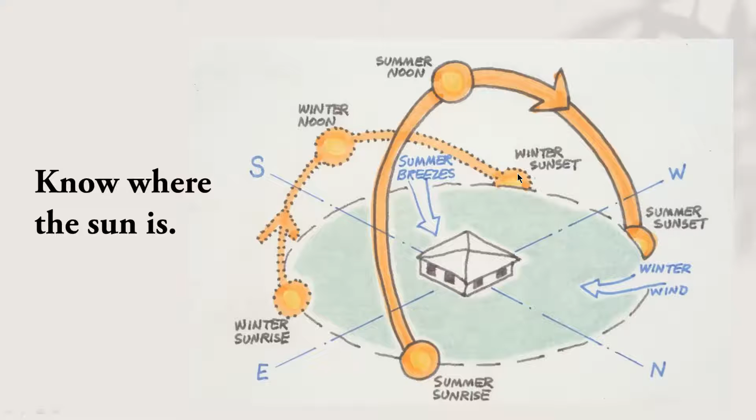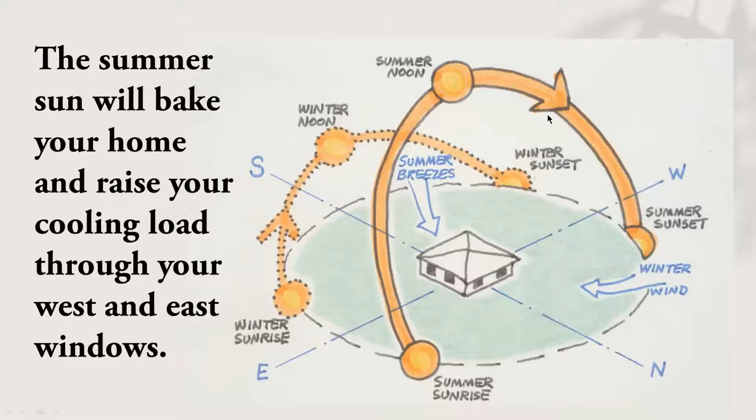So the summer sun over in this part of the day will just bake the west side of your house. And in the morning, if you've got windows over here, that will also increase your energy load to try and keep your house cool. So what you want to do is to plant trees over here on the west side of your house, and then of course the east side is important. The west side is more important because this is the heat of the day and you're really baking yourself now.

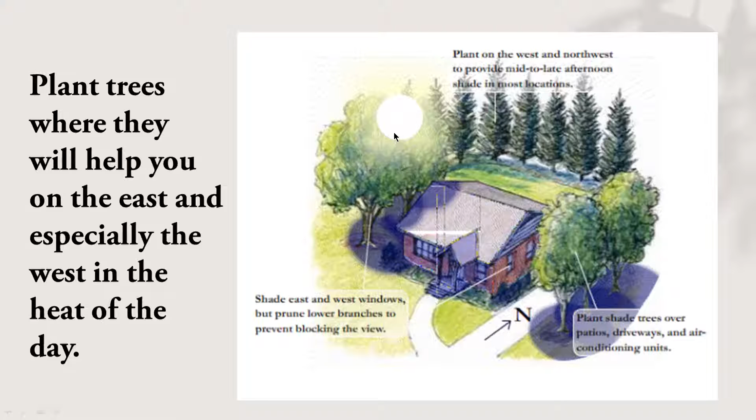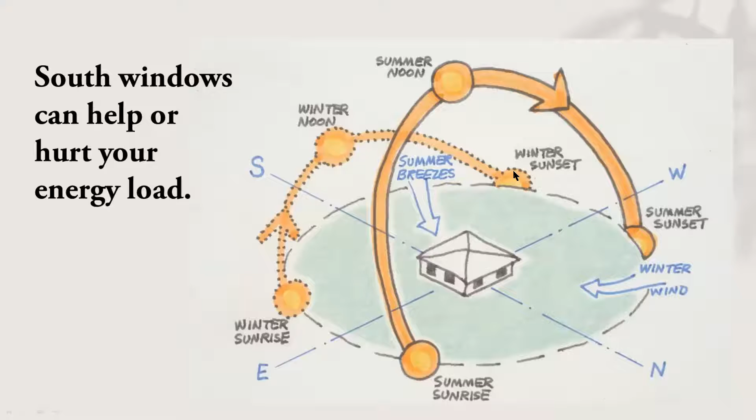In terms of the south windows in the wintertime, they can help you or they can hurt you. And the primary tool you've got is your overhang system. So you can see that we have a shorter window of time that the sun is rising in the wintertime. And here's what an overhang system looks like. We've got a 2-foot overhang this way. We've got 6 feet from the overhang to the bottom of the window.

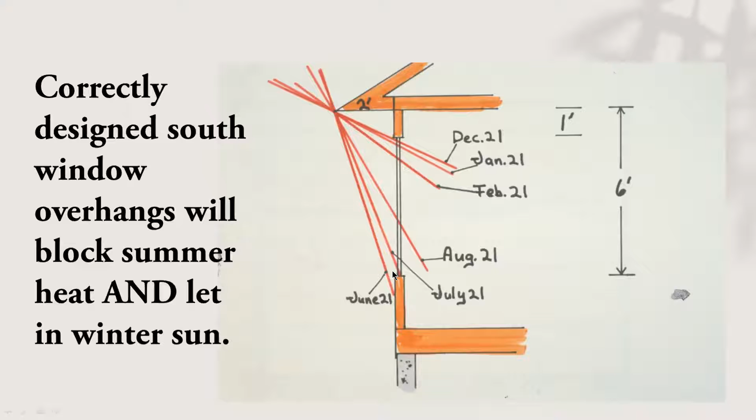And then we've got a 1-foot space between the window and the overhang. So you can see here that on these winter months, for the most part, the sun is going below and entering the house through the window. But in the summertime, for the most part, the overhang is also blocking the sun's energy. So the overhang works very well if it's designed properly.

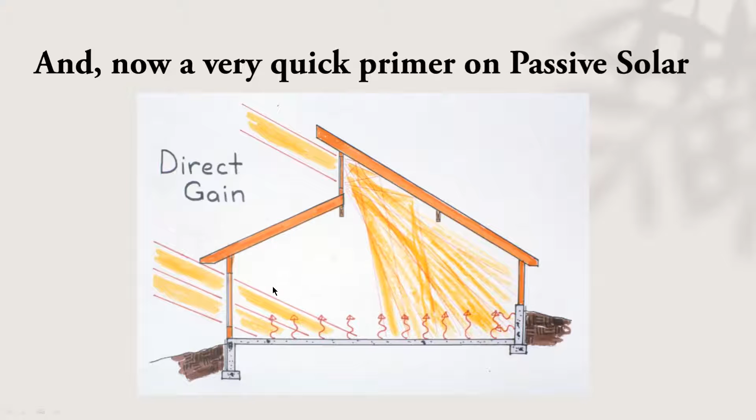And then the third element is the masonry floor in this case. And so this is what is called thermal mass. It absorbs the sun's energy and then releases that energy when the air temperature inside the house cools down. This overall configuration is called direct gain, meaning that all of the sun's energy goes into the conditioned spaces of the house.

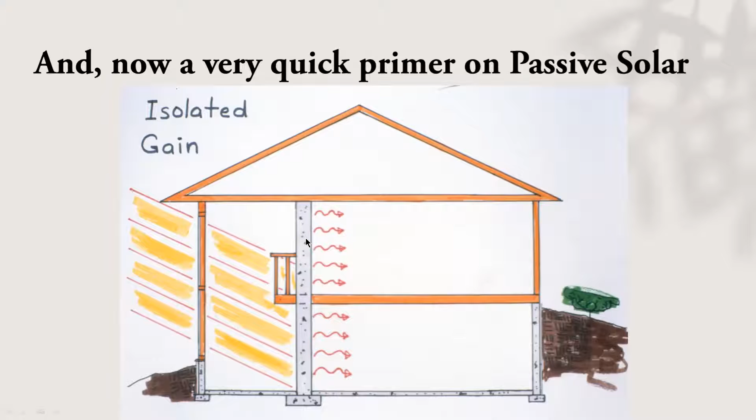Isolated gain is another type of passive solar system, and that is where the sun enters typically a greenhouse and hits a mass wall, and that mass wall will absorb the sun's energy. That energy will conduct through the wall and then into the living space. And the third type is indirect gain, where the mass wall itself is put right up next to the glass with a small airspace in between.

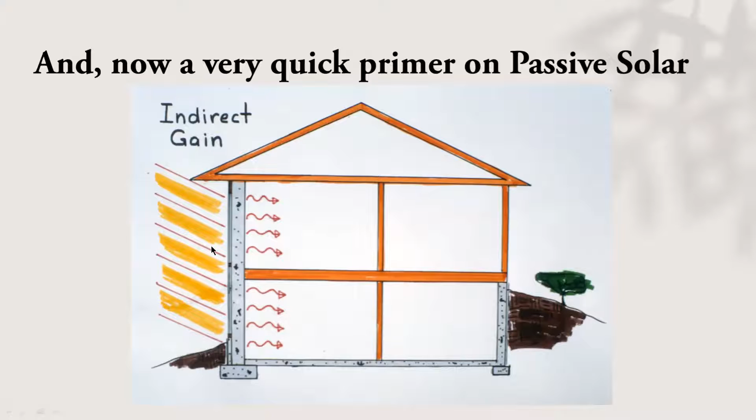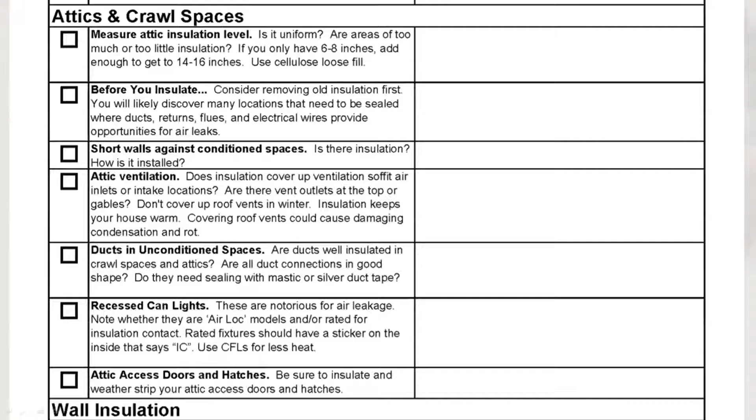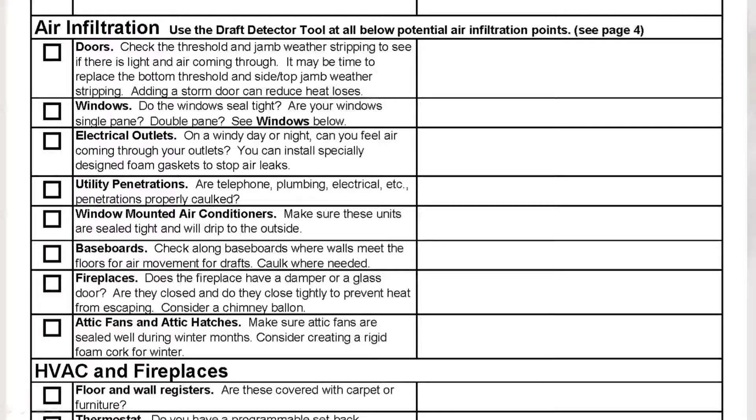Another important area is air infiltration: doors, windows, electrical outlets, utility penetrations, window-mounted air conditioners, baseboards, fireplaces, attic fans, and hatches. And I'm going to quickly go to an example of some of this. This is what we used to use. We would put this hatch on a piano hinge, and then we would raise it up and use these butterfly bolts to hold it in place.

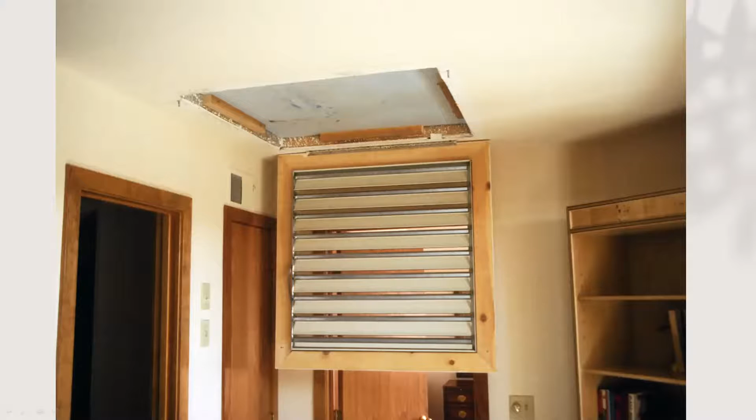And then in a down position, this shows the cork that we use, which is 2 inches styrofoam. It has a gasket on the back to make it airtight, and then it was held in place with 4 little pieces of wood around the perimeter. So there's several solutions for that. That is one great solution for attic fans.

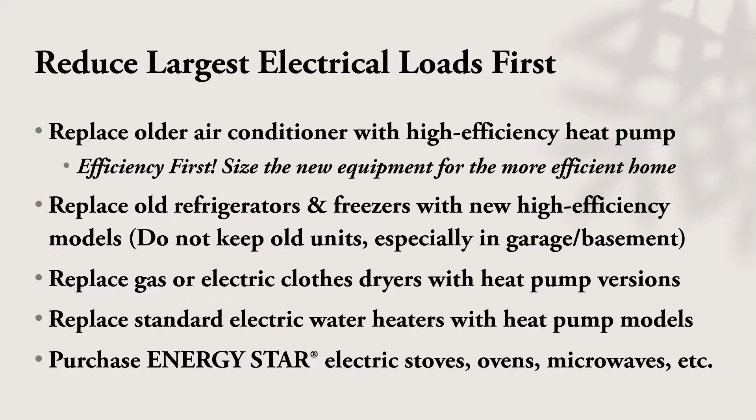Replace old refrigerators and freezers with new high efficiency models. You can even get super efficient models that use a fraction of the energy. We'll touch on that in a minute. Try to replace your gas or electric clothes dryers with a heat pump version if you can. Replace your standard water heater or your electric water heater with a heat pump model. And always try to find, if you're going to replace things like microwaves, stoves, ovens, dryers, or whatever, try to find Energy Star versions.

Other things that use energy, of course, are your computers, your copiers, your office equipment, your entertainment, TVs, and all. So try to find the Energy Star label, and when you do, there's ways to go to the Energy Star website and see if you can find the very lowest energy consuming or lowest wattage unit available.

And every remote controlled appliance in your home actually never turns off. People can turn them off, and your picture will go out on your TV set, but there's actually standby energy being used all the time, so that when you click on the remote to turn it on, it sees that signal and turns on. The only way it could do that is to actually be awake, technically 24/7.

So if you have some items that have remotes that you flip off at night, you can put them on a power strip and turn off the power strip, and it'll turn them off completely. And then you just kick the power strip back on when you're ready to start watching TV or listen to your stereo or whatever. And that isolates them. I mean, it brings them back to life as far as remotes go. So again, the Energy Star website will have that info. Make sure I'm moving along here.

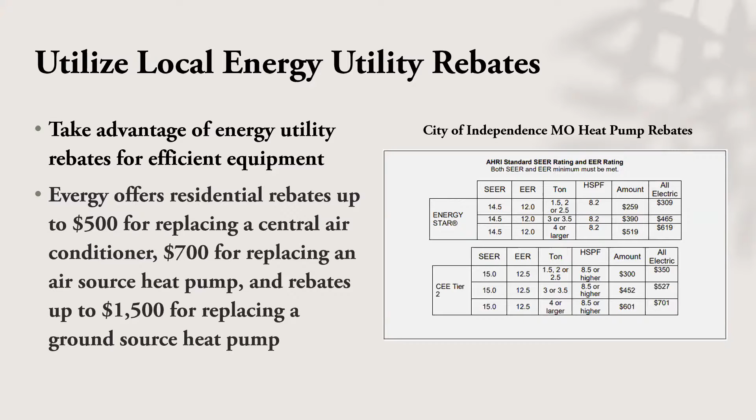And then City of Independence, Missouri, just as another quick example, has a similar rebate program where you can get up to $519 for a 14.5 SEER heat pump, and you can get up to $601 for a 15 SEER version. So there's rebates available, so don't forget about those. Check with your utility.

A quick overview of how electricity is done for most of us right now. If you don't have a solar system or wind energy system or another source of electrical power and you're relying on the grid, right now most of it still comes from coal in our area, although a good chunk of it's starting to come from wind. I shouldn't say most of it comes from coal. It just depends, because there is more and more wind energy being added to the lines around Kansas City that comes from the Kansas area. But in general, especially historically, the central power plant was coal fired.

The power would come from it. It'd go through a transformer and step the voltage up to a high voltage so that it could go a long distance over the transmission lines, which are those real tall poles with the bigger wires. Then eventually it would get to a substation in your neighborhood or in the area. The transformers in the substation would step the voltage down to a distribution level, around 13,000 volts, give or take. And the distribution line takes it to the various neighborhoods.

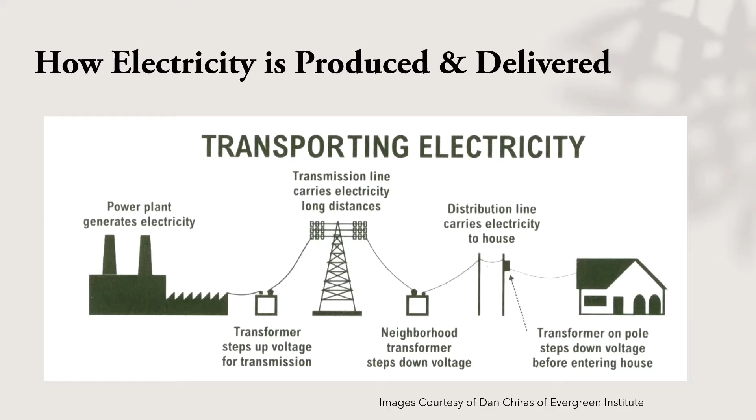And then when it gets to your house, it goes through yet one more transformer, and that steps the voltage down to what we're typically used to using, which is 110 volts for your lights and your outlets, and your typical radios and TVs all use 110, 120 volt. And then 240 volts is also available for things like your electric water heater, your electric stove, your electric clothes dryer, things that require larger amounts of energy.

So questions to ask a solar installer before putting in a solar system: how long have they been in business?

Craig, where am I at on time? I don't have a clock in front of me. How am I doing? Well, I'm not sure where Bob wants to stop us, but it's 4:39 right now, so we're pretty close. I got one more minute, then I'll whip through this really fast. I may not make it.

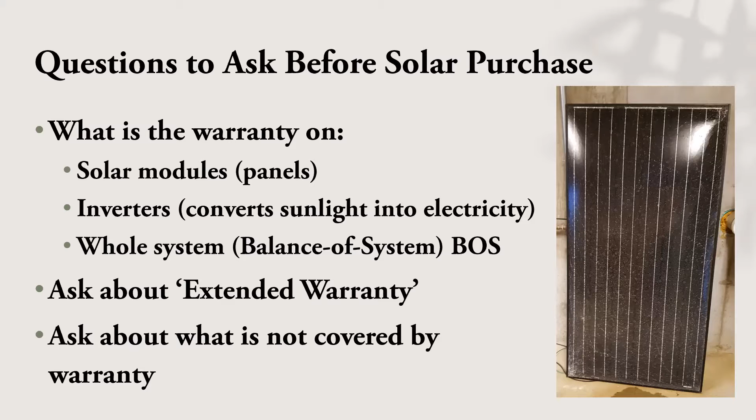So ask your solar installers how long they've been in business, how many systems they've installed. Make sure they give you references, and make sure to follow up with them, because a lot of times they give you references, but if you call the reference, you'll find that they're not that happy. Other questions to ask: what's the warranty on the modules themselves, which is the panels, on the inverters, and on the rest of the system, which is the balance of system. Ask about extended warranties, and be sure to ask what's not covered in the warranty.